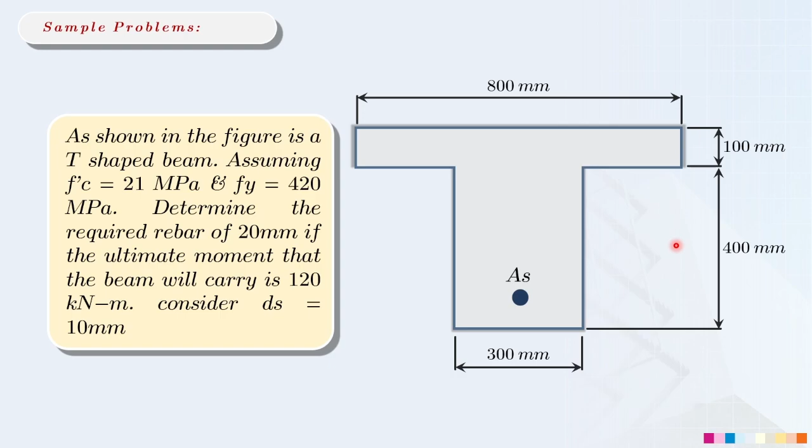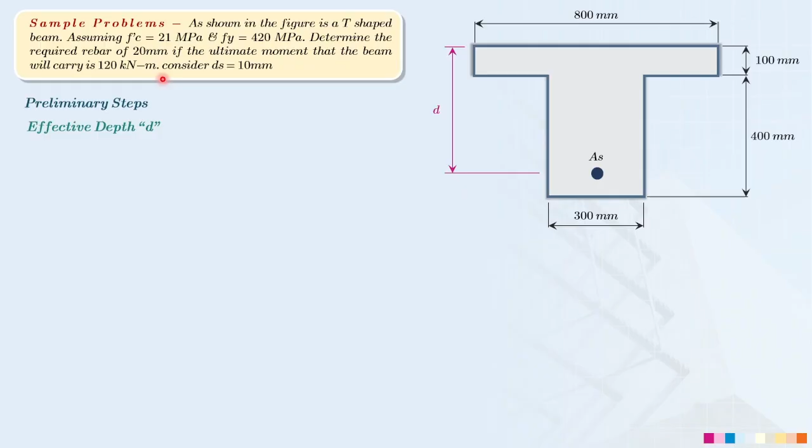Okay, on this non-rectangular beam, which is in the sample problem, ang kailangan muna natin gawin dito is we need to determine the preliminary given, which is we need to determine first what is the effective depth of this section. Of course, given tayo ng ating ultimate moment, yan yung pagbabasihan ng ating design later on. So, para makuha muna natin yung ating effective depth, best to assume that the arrangement of our reinforcement is in a single layer. Okay? So, what we need to do here is we need to just add first the concrete cover, which is by default 40, plus the diameter of stirrups, which is 10, and then the half of the main reinforcement, which is 20 over 2. So our effective depth here is now equal to 440 millimeter.

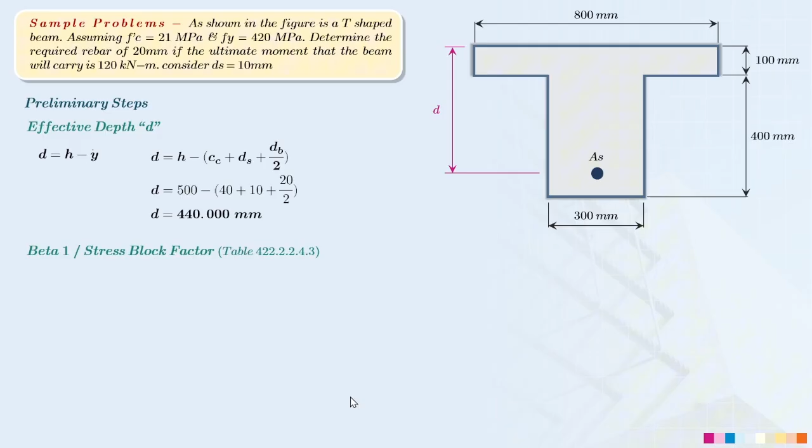So the next thing that we need to do here, we need to determine the beta 1. So for our beta 1, which is depending on our f'c, which is 21 megapascal, this is between 17 and 28 megapascal. So the beta 1 here is now equal to 0.85.

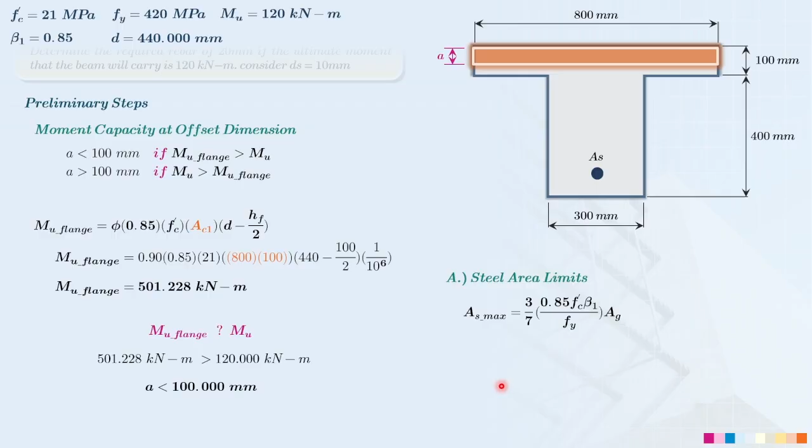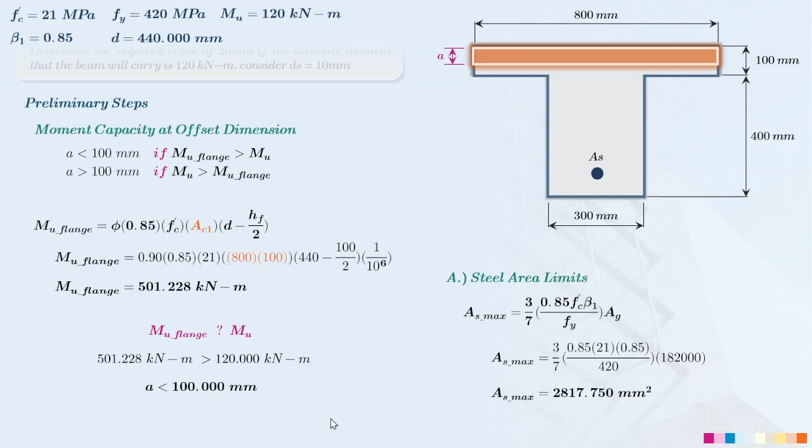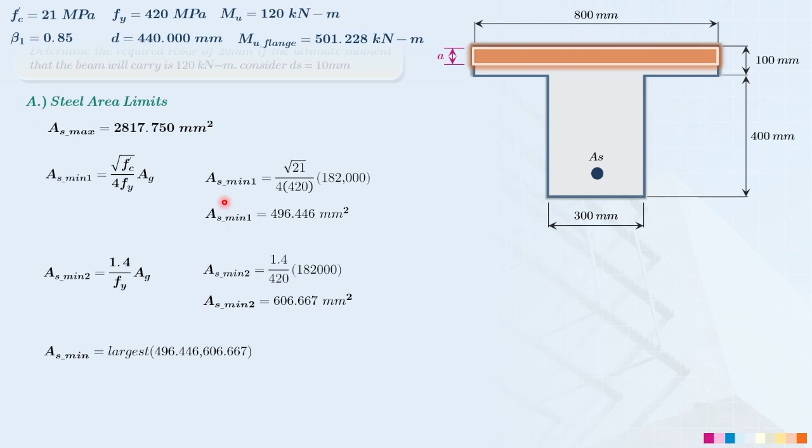So ibig sabihin lang yan, we can now proceed muna sa ating steel area limits. Of course, dalawa lang yan: the maximum and the minimum steel area. For our maximum steel area given by this derived formula, substitute lang natin yung mga nakuha natin kanina, ang lalabas dito is 2,817.75 square millimeter for the maximum steel area. But for our minimum steel area, dalawang value lang yun. For the first minimum steel area, given by this formula, ang makukuha natin dito is 496.446 square millimeter. However, the second minimum steel area given by this derived formula, ang makukuha natin dito is 606.667 square millimeter. Obviously, kailangan natin kumuha dito ng pinakamalaki sa dalawang minimum steel area natin. And ang mag-govern dito is 606.667 square millimeter.

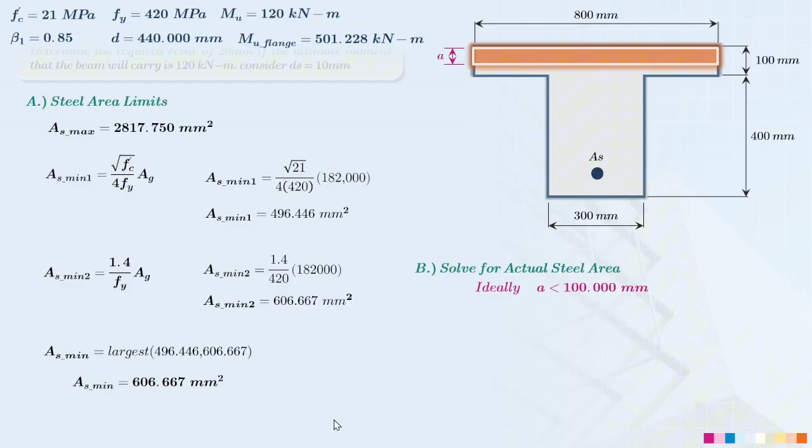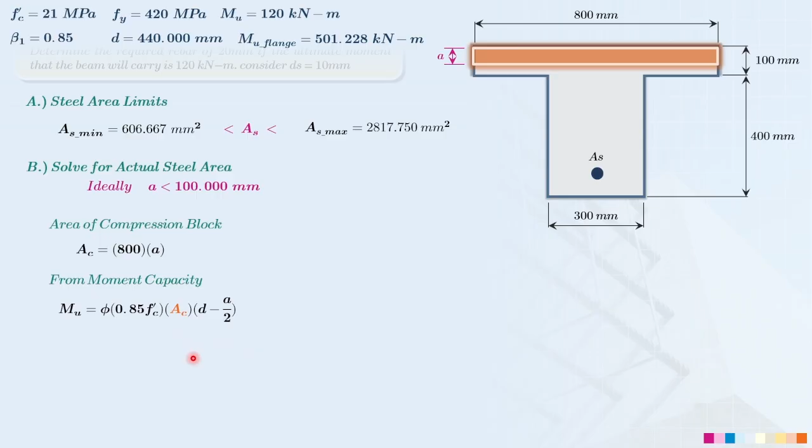Ngayon, we need to solve now for the actual steel area. We already know, or ideally, dapat yung value ng makukuha nating a should be less than 100 millimeter as our offset dimension. So for our area of compression block, this is just simply a multiplied by b, or should I say, 800 multiplied by a, kasi yan lang yung sakop natin. So from the moment capacity, we will use this formula. Mababago lang dito yung area of compression block and also yung ating moment arm. For our area of compression block, we will use here, once again, yung 800 times a. However, yung moment arm natin should be half ng height of a up to the effective depth natin, which is nasa center ng ating steel area. So once we substitute all of the values, ang makukuha nating value ng a is now equal to 21.759 millimeters, which is less than 100 millimeters so that it can satisfy the condition.

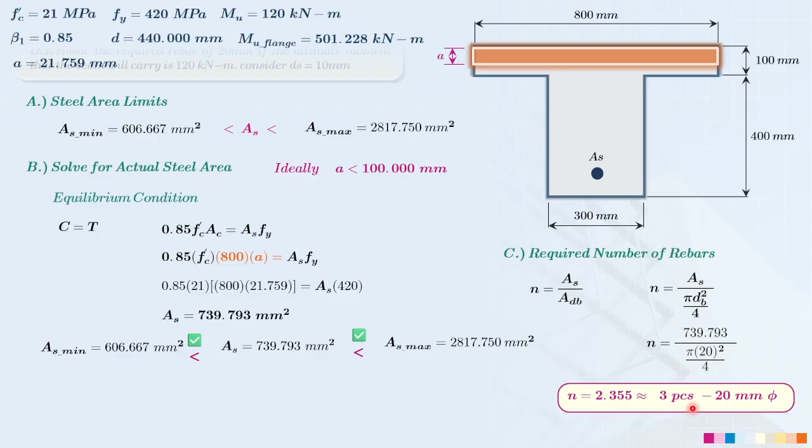Ibig sabihin lang po niyan, we can now determine the required number of reinforcement. Napakasimple lang yan kasi i-divide lang natin yung total steel area sa area ng isang reinforcement natin. Okay? So, substitute lang natin siya directly so that ang makukuha nating number of rebars is now equal to 2.355, or round up tayo, 3 pieces of 20 millimeter diameter reinforcement. So, ito po yung ating sample problem for that.